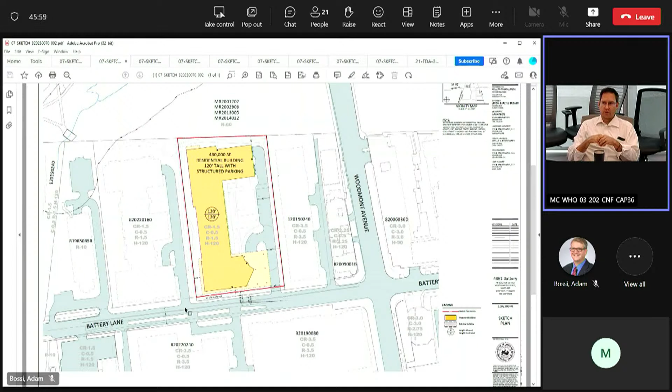So we've got a significant change. You said something that I took it as that the building to our west was left a little more space for the sidewalk, unless I misunderstood you.

No, so I might be wrong. I can't remember if it's that the sidewalk is a little bit wider than the minimum, or the buffer is, but whatever those dimensions are, I'd like them to match. I'm pretty sure even our cantilevered piece, or, I think I know.

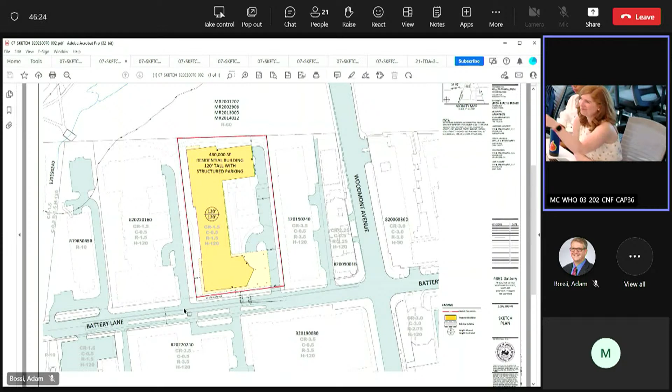I think you're talking about the sidewalk width. At the right ground plane. Okay, no, and I appreciate you being sensitive to it because now's the time to have that conversation. Totally, clarifications are important. I would just say that I looked at what you guys had, and you even said that the cross section is going to change, but I looked at what was approved for 4901 and just make those widths match, exactly what you're saying.

Yeah, okay. And from a streetscape design perspective, we do want to have some measure of continuity, because the idea is to have this colonnade of trees and more shade. So if there's a different tree that works better there, Josh, please let us know.

Our main concern with these things usually is that we want primary species trees curb running. And closer to the building, we're more flexible, but we do want to maintain some measure of trees along this. But if it's Carpinus or something else, tell us what you think is going to work well there. It would be weird to have two rows of trees and then one of them turns into just ground cover or a hedge. We just need to tread that a little bit carefully.

So happy to hear it on sketch plan. And that's why we love sketch plan on its own. Yes.

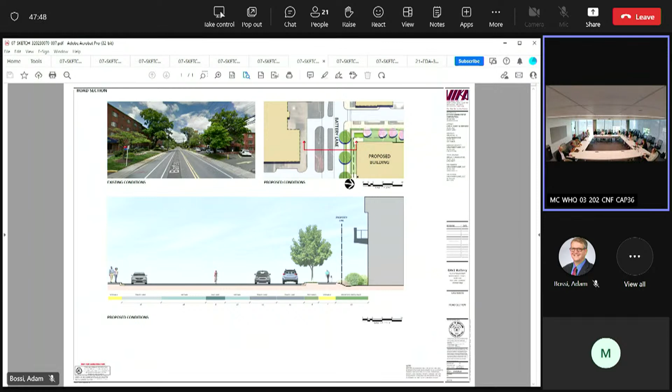Do you remember what was done with the frontage for the building to our east? I didn't double check that. I don't know, because I think that may have come in right when the streetscape guidelines were being finalized, so I don't think we pushed as hard on that one. But that one we only have a preliminary plan, so we don't have the site plan fully fleshed out. The idea that's part of the district sketch plan, so they were the ones that proposed this double row of trees, and everything we've done so far has matched that.

The species we actually don't mind varying at all, because if you all have the same species, if a disease catches it, they can all die at the same time. So it's good to have variety.

I'd like to use something certainly more columnar. I know cultivars aren't always preferred, especially for taking credit. We might not take credit for these, but use a cultivar that does better in these conditions.

And also, this project is not in the CBD area, so that's just as well where you pick something from the species list. The other thing I was going to say was, for the same reason, the sidewalk is concrete.

Really? Yeah, we had this discussion kind of late in the game after 4901 was approved, but because this is outside of the buffer maintenance area, at least the travel way needs to be concrete. We have some flexibility with putting brick in either the buffer area or right in front. We can also do it right in front of the building to kind of do a thing, but generally speaking, we're looking for poured concrete here.

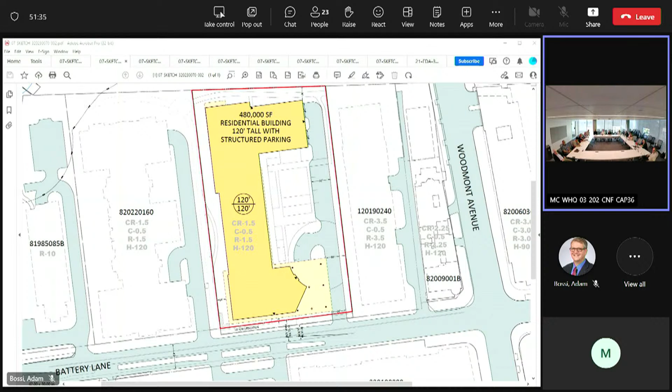You're a frequent flyer here, so I figure you know. That's all I had. I didn't know if Chris wanted to bring anything up or if Josh had anything additional to raise.

I just want to say thank you so much for the circulation pattern. I know it's duplicative of other things that are out there, so it's not as exciting for your architect, but from a safety standpoint and circulation, we really appreciate it. We look forward to working with you on the pathway connections in the future.

Likewise. Thanks, Ian. Thanks, company.

Just quickly, I want to hit on the schedule again. If you're looking for an October DAP meeting, your deadline to submit is the 11th. You can talk to Grace and Kashil about getting the application in. Your first resubmission on the sketch plan is due September 26th, and we're due to have comments back to you by October 6th.

Your last submission is due October 16th, and our last comments will come out on the 24th, the day before the DAP. Our staff report is due to post November 6th, and this is all working toward a planning board hearing date of November 16th. Agreed. Thank you. Thanks, everybody.

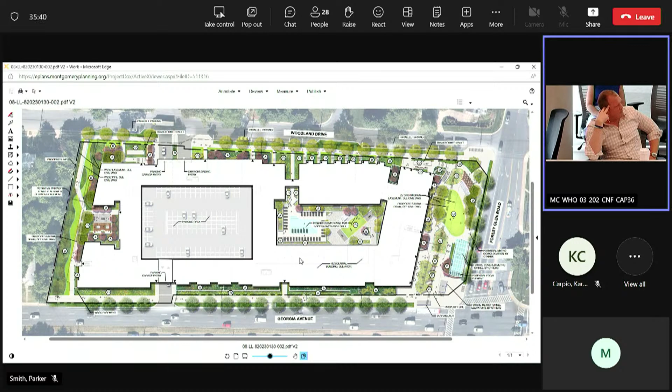And I think we're getting there. We might not be there, and I'd have to work with you guys, but I think we're getting closer to what I think will work. And we hear you, we don't want this to be that one. Yeah, because I walked it two weeks ago, and it feels worse every time I walk it.

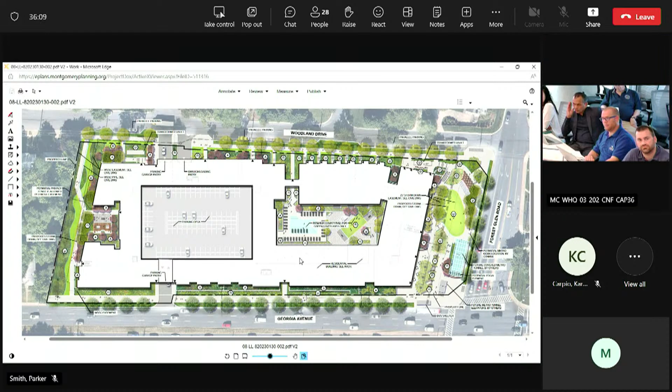And this one's over, even at its pinch points, it's at 40 feet wide. I think for that particular area of the property, and even for the civic green and the discussion around the streetscapes, it's going to be really helpful for us to see some sections. Because what you can read in a landscape section drawing is irreplaceable from any other type of drawing. You can't get that dimension in a plan. You can't really get a sense of it even from a three-dimensional perspective view, because it skews the space.

We need to look at all that stuff in true sense, true scale. And then we can talk about, okay, there's this much space here, this is what you're proposing to put in here. Does it meet that goal to have a safe, attractive, convenient through-block connection?

So when we talk about the design pieces, and quite frankly, this is reflected in the comments, this is site plan, this is our final review of the architecture and landscape design. So we are asking for more detailed drawings. We need those to be able to even agree or disagree with you. I think it's reflected in our comments. When you put together a response, it'll be helpful to give us that detailed information along with your responses so we can clearly understand what you're trying to communicate back to us.

Because right now the drawings are pretty small scale, there's a lot going on, it's hard to even agree or disagree based on the drawing. So we just need more information, and site plan is the time to do it. So when you put together a response, we request that you give us clarity and detail to the extent needed to come to a consensus on these points.

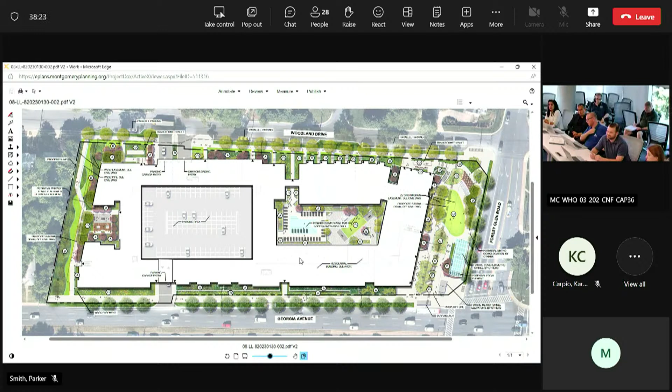Alright, anything else? Just in terms of timing, with some of the other items, I think we're supposed to be resubmitting on the 27th. I'm not certain that's going to happen, so we'll discuss it, but we might. You can contact me with updates on the schedule and follow-up meeting requests of all shapes and forms. We'll send out the meeting request for next week sometime, probably today. Great, great, thank you everybody. Thanks, thank you.

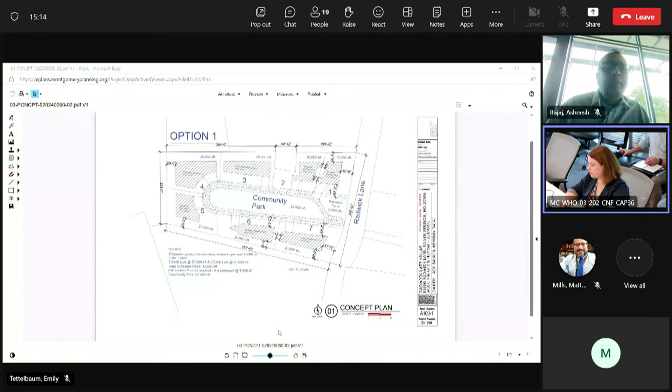I am sharing my screen to show option 1 of the concept plan. Thank you so much for submitting this concept. I think it's really important for sites like this that are challenging. Obviously, the site has challenging topography and a number of environmental features, which will make it challenging to develop. Unfortunately, as we said in the comments, the two concepts that were submitted, both options are not going to work with the current zoning and environmental constraints, and the design of the proposed road here would not be wide enough to meet county standards, either as a public or private road. So we've given you a number of comments, and I answered all of the questions that you submitted. They're all in the uploads folder if you didn't happen to see them. We'll turn it over to you, and happy to answer any questions you have about our comments.

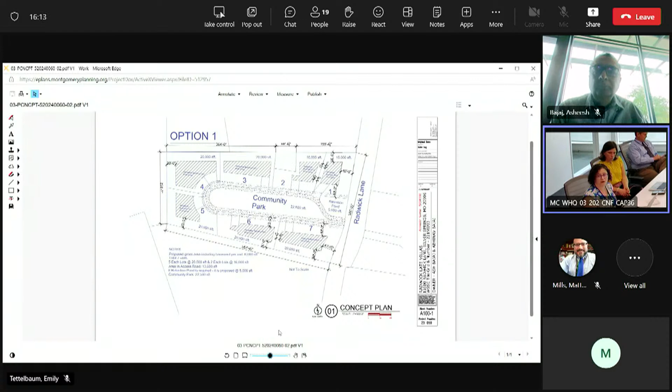Okay, thank you, Christina, and thank you to the board for the DRC meeting. Before I get started and introduce my team, I'll quickly mention that I'm in transit, so there is some background noise. As I go through this, if it's unbearable, please let me know, and I'll quickly stop and mute myself. Our team is made up of Ash, which is me, Abhinav, who is a local resident in Baltimore, and Monica, who is our lead designer. I'm also part of the owner and designer team. We're an architectural design firm in Austin, Texas, and we were planning to work with Abhinav and be partners in this development.

I understand your concerns regarding the options. Option 2, as I submitted it, I don't think will work anyway, because R200 doesn't allow for less than 20,000 square feet. Option 1, I understand that if we widen the roads to 20 feet wide, we get the turning radiuses that are allowable by fire truck. We follow the road construction guidelines that make it a dedicatable public right-of-way, and we account for the stream valley buffer, and take out the lots that are less than 16K square feet. We may have something that could potentially work. It may not be 7 lots, it may end up being 4 or 5 lots. In concept, does that sound close to doable?

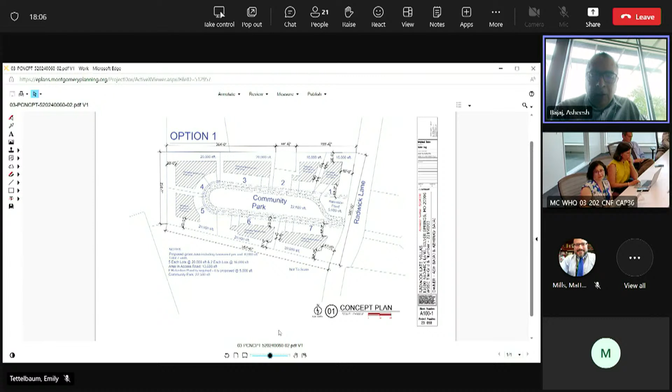The site is mostly forest, so you would definitely need to account for the forest conservation law too. Right, and I'll get to the forest conservation in a little bit. We are pretty heavy on vegetation here in Austin, Texas as well, and I'm aware that a tree and topo survey needs to happen so we can identify the exact trees and then talk about which trees would get mitigated and which other trees would need to be saved.

But before I get there, I had a few other items that I'll quickly go through. We did not engage a civil team yet, but if the project looks reasonable after this meeting, we have a civil team on board and we will engage them. Right now the road layout may not look accurate because of that reason. Once the civil team gets engaged, they will work through it.

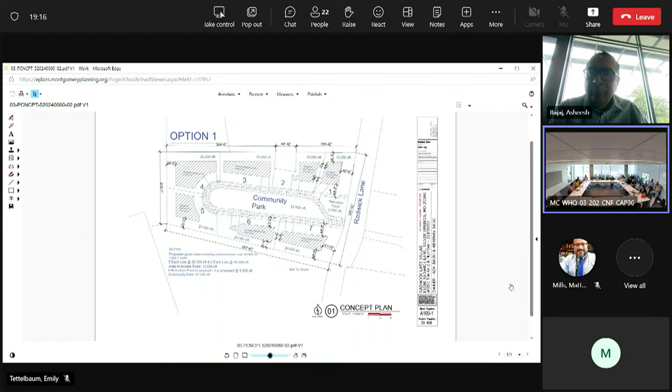I'll quickly, if I may, can I share my screen? Because my questions are highlighted on my documents, and it'll make it easier for you to answer my questions if I were to do them first. Sure, yeah, you should be able to. Okay, I'm going to share my screen. So please let me know when you can see my screen.

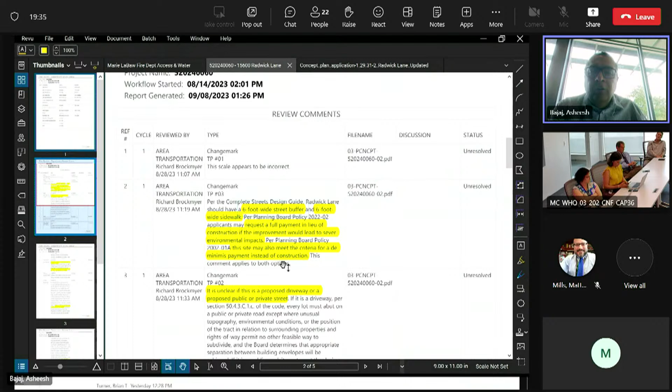Yep. Okay, so this is the document that was uploaded, and I've just gone through it, and I have a few questions, and I'll quickly go through my questions. I have no comments about the 6-foot wide street buffer and the 6-foot wide sidewalk.

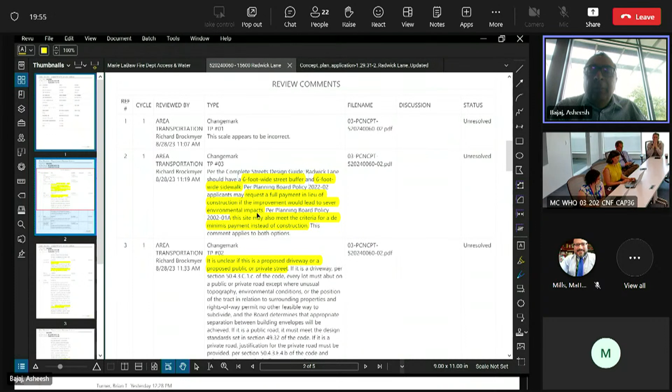Request for full payment in lieu of construction if the improvement would lead to severe environmental impact. What does that mean?

This is Richard. I made that comment, should be severe, sorry. So there are ways that you can do a payment in lieu of construction, and so I just gave you the two options. You can do a fee in lieu, and then, I'm not sure if it's on this comment or another one, it may be a de minimis payment. So there are just two options to address that Complete Streets Design Guide requirement if you don't want to do construction.

But you'd have to basically show that there's going to be severe environmental impacts or that you meet the de minimis payment requirements. And Richard, I apologize, I'm well versed in design and construction, but I'm just not well versed in the local things of Baltimore or Montgomery County area.

When you say instead of construction, you mean I could build a road that is per code minimum, but may not comply with Montgomery County's specific construction requirements, and I have to identify how environmental impact happens if I were to go to the level of complying with those requirements. Is that what we mean?

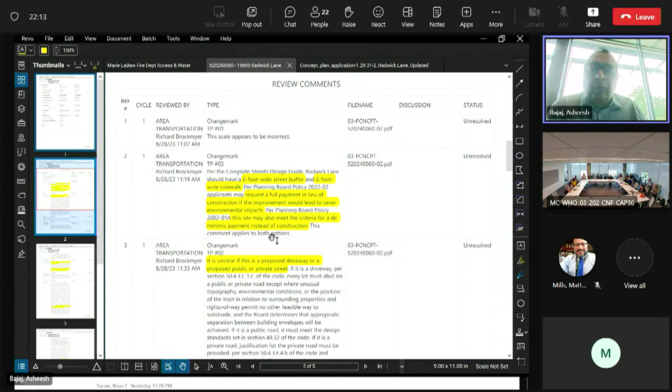Moving on to number 3 on area transportation, the yellow highlighted comment: it is unclear if this is a proposed driveway or a proposed public-private street. I was open to both. I understand that if it's a private driveway, it cannot have more than 4 homes on it. I may get limited to four units anyways based on the stream valley buffer and the other requirements, so I may consider a private street. Is that assumption correct, that a private street can serve 4 units?

A driveway can serve up to 4 lots. A private street can serve any number, but I think Brenda's on, I'm not sure if DOT has an opinion on whether that would need to be a public or private street, but in either case it'd have to be built to the standards of the street type. Understood. Okay, moving on to my next question, fire and rescue for Marie.

Fire department vehicle access and water supply is required for the site. I understand that the current zoning of this land is such that even though water and sanitary sewer is present right outside the site, I cannot tap into it until I change from S1 to S6, or if I'm using wrong terminology, change from one type to another. Is that what you meant, Marie, or is there some other intent behind that yellow highlighted section?

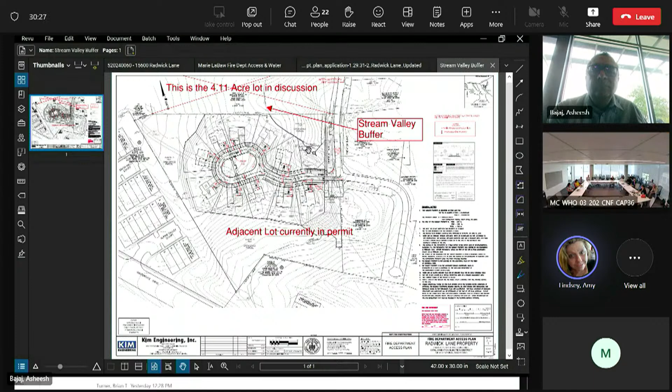So what they've put up on screen is there was a property directly below yours. And you can start to see, because they were mandated to show 100 feet off-site, you can start to see where, at least partially, the stream valley buffer is. So we would be looking for access to occur in an area that's not within the stream valley buffer, because there is more frontage that access could occur in.

Understood. So that's why I pulled up this one, because I know of this stream valley buffer, which again, there are different terms used in different geographical areas in the United States. Does a stream valley buffer mean a creek or a water flow, a low topography point where the water finds the natural path of least resistance to travel to the lowest point of the ground? Is that what it is?

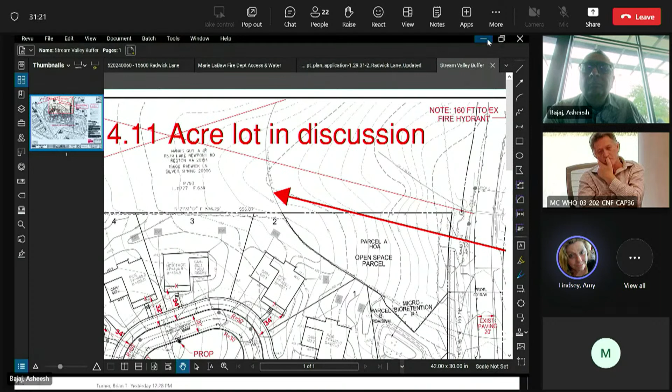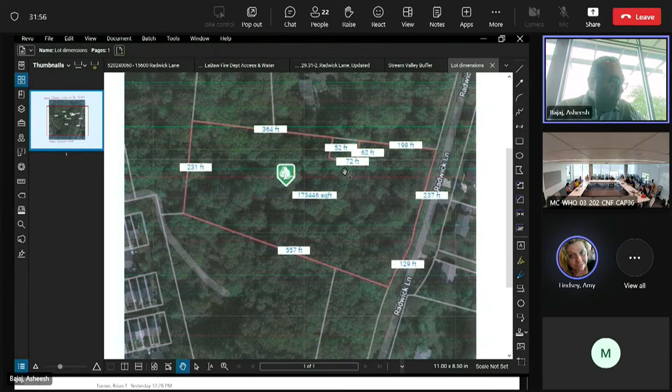So Montgomery County has our environmental guidelines that we use, and we standardize our stream determinations. So you can have an ephemeral channel, where there is only water flowing in direct response to rainfall. You could have an intermittent stream, which is a channel that has water flowing for part of the year, perhaps in the spring when the water table is higher, or you can have a perennial stream. And then the stream valley buffer is determined by the watershed you're located in, the slope of the ground surrounding it. There are a lot of issues that play into that, so it's very site specific, the drawing of a stream valley buffer.

Understood. So all that said, what percentage of trees - I mean, as you can see from this PDF, where did it go? Let me quickly pull that up again. As you can see from this PDF, this is a completely wooded lot. It doesn't have one location that's not wooded.

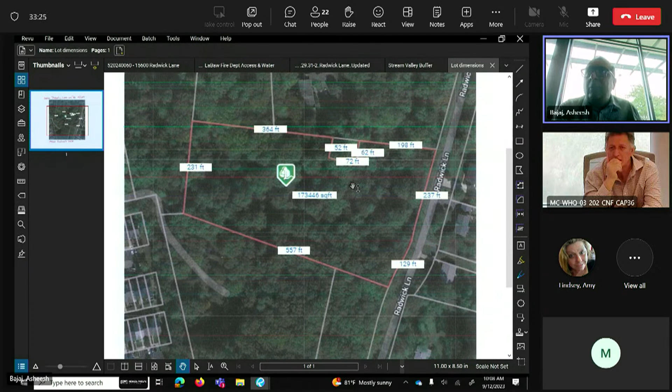My question is, as a developer, I'm completely on board with getting creative with saving trees, and I attended the DRC meeting for my neighbor here, so I understand that I cannot cut lots and conserve trees within those lots, because then it becomes the responsibility of the lot owner not to cut it, and those folks either knowingly or unknowingly don't comply with those requirements, and they end up cutting heritage trees that may be on the land. That's why the county wants to specify a zone. And what I'm trying to understand is what percentage of this site - 20%, 10%, 30% - what percentage of this site needs to be that zone? So I can understand if this lot is developable for more.

So, once again, as I was trying to explain with the worksheet, it's not just a straight percentage, right? It's a bit dynamic depending on how much forest you have. So I can't give you a straight percentage - we have a whole process for figuring that out.

But if I'm looking at live oaks, would you say don't cut the live oaks because they have some value? Is that roughly what you mean in your evaluation? Not exactly. I understand what you're saying, but we look at forest and trees separately, though they're both covered under forest conservation law. Forest is seen as a whole community.

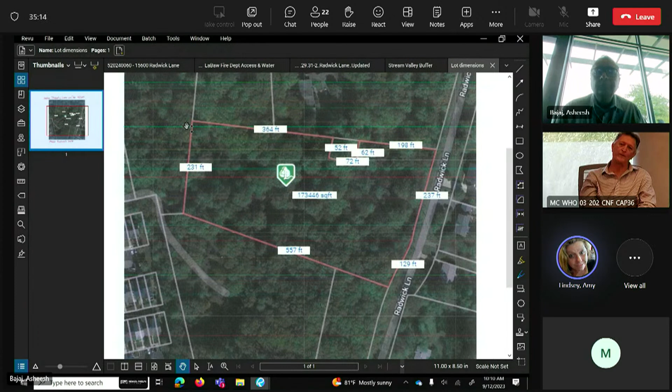So for example, with an acre of forest, I may, in terms of prioritization, look at whether it's protecting a stream valley buffer, whether it's primarily invasives, or whether it has big trees in it. But for prioritization standpoints, still, one acre of forest is one acre of forest, and that is what the forest conservation worksheet is looking at.

Then when you get down to the individual tree level, sometimes it has to do with the size of a tree. For example, trees that are 30 inches in diameter and greater are protected specially and require a variance in order to remove them. A 30-inch diameter tree is actually a huge tree if you think about it.

It's got a lot more nuance to it. I can't just tell you leave 20% of the site untouched and you'll be fine, because I don't really know that. We go through the whole process, and doing a natural resource inventory is really your first step in moving forward, and that will give you a lot of answers. I can't even tell you exactly where the stream valley buffer is at this point.

Okay, and is a natural resource inventory done with a civil engineer doing a tree and topo survey, or what is that process? So there are three types of individuals that can prepare these plans: either a Maryland registered landscape architect, a licensed forester through Maryland, or a qualified preparer, which is a specific qualification you have to take a test to get.

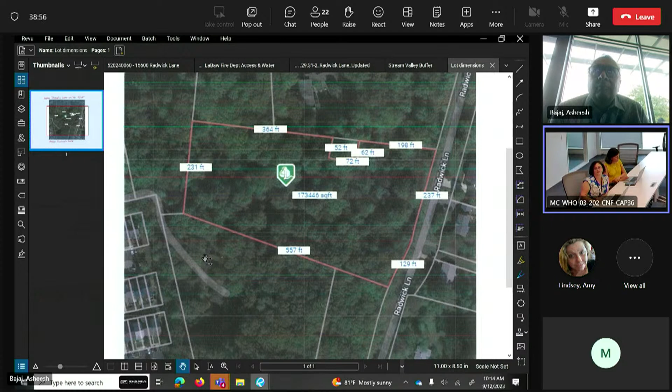So the lot just to your south was approved with the cluster method of development, an optional method of development. They've actually since come back to us because that development that was approved is not feasible. So we've seen concepts for many fewer units, but the minimum tract size required for that is 5 acres, and with the cluster method you can take advantage of smaller lot sizes. But the property you are looking at is less than 5 acres.

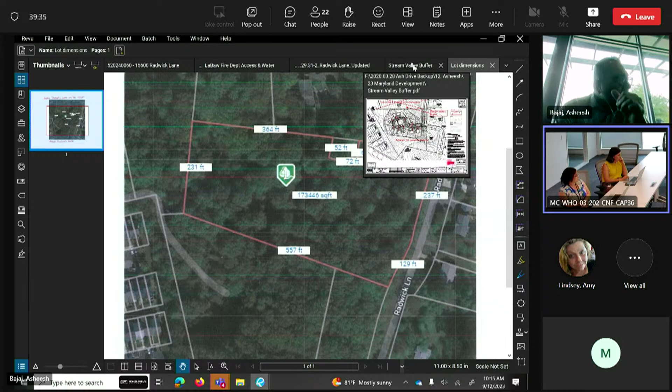Yeah, I understand, so the optional method isn't a possibility there. That is why we recommended you potentially reach out to the property owner to the south, because you might be able to do a much more cohesive development with both of those properties, since I think they're both very challenging to develop, especially on their own. Right, understood, I'll submit a sketch showing the concept of how you can envision, if both parcels get combined, how the public road or private road can go through both parcels and create a much better cohesive layout for the units.

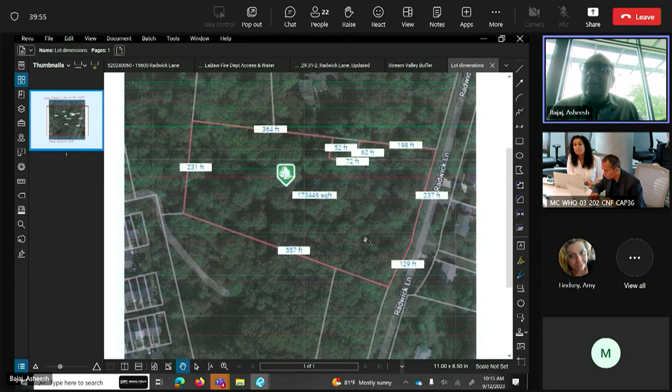Yeah, no, I understand that. I saw your comment and I agree it would be much more effective if these two sites were to combine and do a cohesive development. And if we move forward with the lot, we will definitely consider that and reach out to them for doing that.

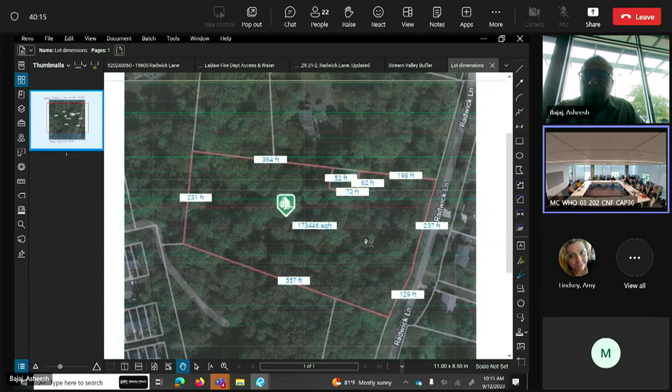We are running out of time, but I do want to make sure we touch upon your water and sewer issues. Sure, please go ahead.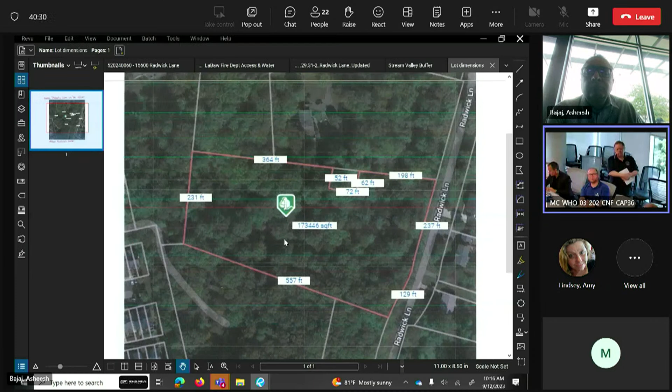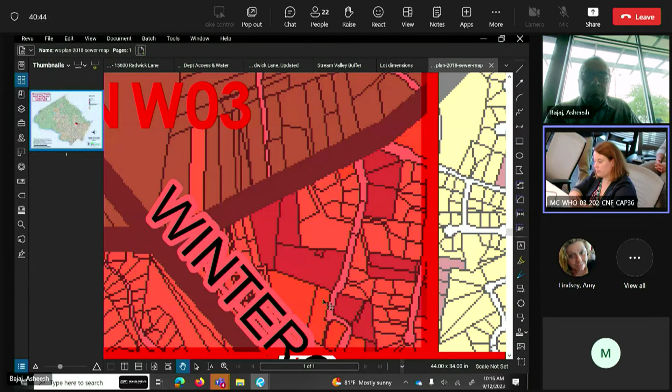Yeah, Alan Sukup with the county's Department of Environmental Protection. You're in the right water category for public water service here, it's W1. But at the moment you are in category S5 for sewer, which means that in order to use public sewer on this property, you need to get a category change from S5 to S3. Okay.

In my comments, I put a link to the county's webpage for category changes, where you can find some information on them. You can find the application form, so you can start that process now.

How long does it take to do the category change? Depending on when you apply in our cycle, it can take 4 to 7 months. But it's not something that's iffy, I can get it done, it's just time. Well, I never promised anybody anything. Understood, and I completely get it, I don't make the decision.

This is a property that is within the county's planned public sewer envelope, so I think the chances of getting a category change are very good. Understood, understood, okay, that's that.

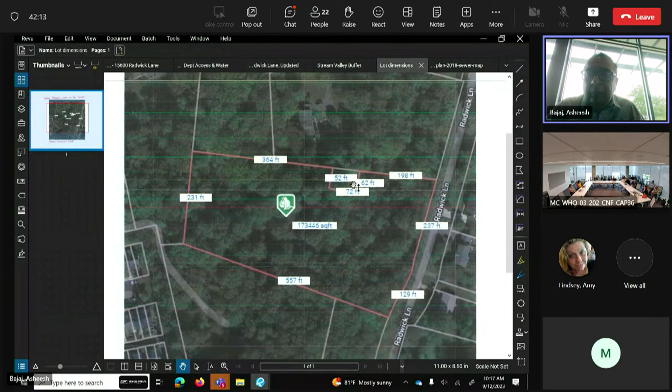I think I understand that. I'll quickly go through the rest of my questions, and I think I answered that one. Does anyone know if there are any restrictions or easements on this lot? I specifically asked that question because I see this little square - I'm trying to zoom in, bear with me. Some county drawings show this, some don't. I don't know what that is. It looks like it's not inside my property, but I don't know what that is, and that's why I'm asking.

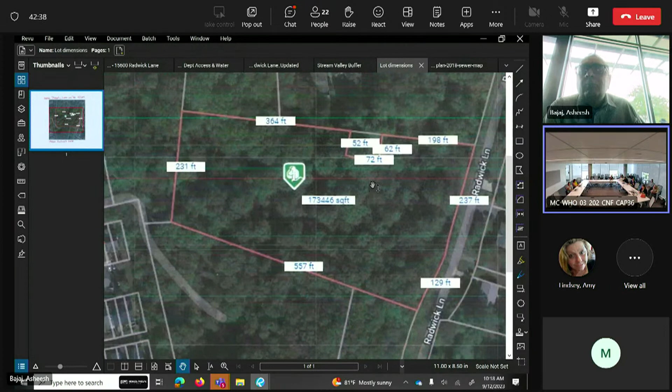I looked through our records and didn't see any easements, and I'm not sure what this drawing is from that you're looking at, but I do encourage you to do a search through the land records to see if there is anything. Okay, I can have my title company do that.

The next question I have, we talked about that - we will have a request to change in sewer, so the discussion of sewer and water applies to both sewer and water, right? Just sewer. No, the water is category W1, which means it is approved for public water service. Okay got it, understood. Category S5, that's for the sewer only, that's the category that needs to be changed.

Understood, okay. Did you see my answers to these questions? I did, and I still had some follow-up questions. Okay, I just wanted to make sure you saw that. Yeah, no I did, thank you for that.

Number 16, I found a calculator online on Montgomery County's website that talks about the impact fees. They were coming out for a 3,500 square feet or 4,500 square feet home. It was coming out to be more like 50,000. Is that approximately correct, or was I misreading something there?

So WSSC would be the one, I believe, that calculates that. Is that correct, Alan? You're asking about fees for water and sewer connections? That's right, the impact fees. It was all the impact fees, not only water and sewer, it was the school district impact too. It was all impact fees.

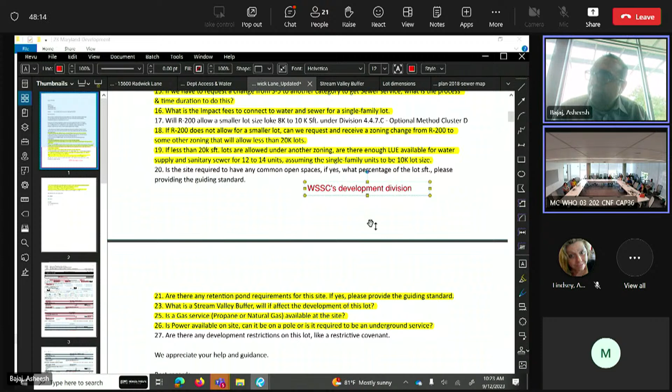Anybody from legal have any thoughts about that? I'm not sure I totally understand the question, but...

Essentially, you build houses but don't sell the land beyond the house. They only own the house and the land underneath, even though the HOA may let them treat a bit of it as their backyard, but everything outside their built area is HOA, not their land—part of a published condominium regime. It would be detached houses. Are you asking about detached houses? Yes. I've never heard of anything like that.

So the resident would own the lot that they have the house on—is that what you're asking? The resident would only own the extents of the carpet area or the built-up area. They won't own any more than the exterior walls of the lot.

I can send you some published documentation. I know we're running out of time, but if this would be considered, I think I could solve the forest conservation requirements, because I'd be able to save most of the trees. What I wanted to do on this whole lot was leave it wooded, so it gives privacy to each lot owner, and they feel like they're living in a wooded zone, even though it takes away most of their backyard. They'll have a smaller backyard, but the community would mostly be left with trees, and the only things we'd clear are roads, building footprints, and maybe 1,000 square feet of backyard.

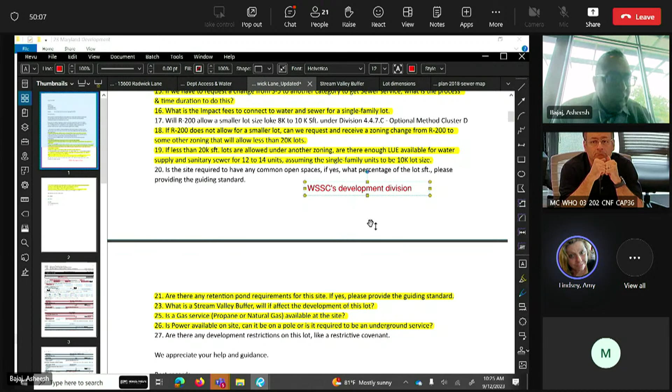That's how much we would clear from the forest. While I think that's very laudable, it's very difficult to accomplish because of the site grading necessary and the need for positive drainage so people's lots aren't draining onto each other's. That is one thing that is good about this lot—the topography drains towards Radwick Lane, with a 40-foot drop in topography from the back to the front.